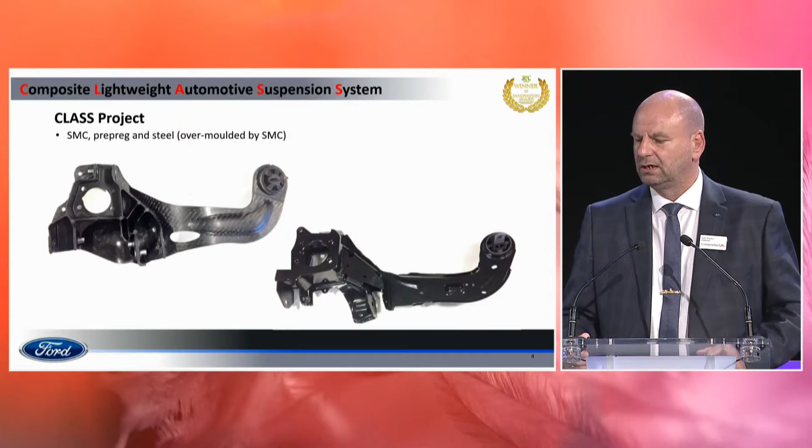So my role is to get as much weight out as possible to improve the payload efficiency of our commercial vehicle range. I'm going to take you through a couple of projects we've been doing at Ford in recent years. The first one was called Class.

People in the room are probably rolling their eyes now, thinking, he's not going to present that again, is he? I've presented this around the globe many times. This was a project that actually won the JEC Innovation Award in 2018, which we're very proud of.

This component was supposed to be a 100% carbon fiber rendition of the fabricated part you can see on the bottom right-hand side there, a rear suspension member for a Focus RS. So that's not my day job.

As I said, I'm a commercial vehicle guy, but this kind of landed on my desk, and we were very keen to work on it because I'd never worked in composite materials before, so I was really eager to learn. What we learned was we couldn't make it out of carbon fiber, not in its entirety.

After about 2 years of this project, we realized the goal we had just wasn't feasible. What we ended up with was a mix of carbon fiber material: we had UD prepreg from the front to the end, but SMC in the areas where we needed heavy geometry overmolding a steel insert. So we had 3 different materials and 2 different resins that we compressed and molded to make this part.

The reason for doing this is because we make the unsprung weight a little bit better, so we improve the suspension performance, but we also improve vehicle performance a little bit and reduce its CO2 output because the vehicle's lighter.

So we did a life cycle analysis on this - I'm not going to go over that project in detail, but I'll happily answer questions on it later. If you think of a Focus platform, that goes all the way from a basic Ford Focus we have in Europe, all the way to some of the really high-end Lincoln derivatives we sell in the US.

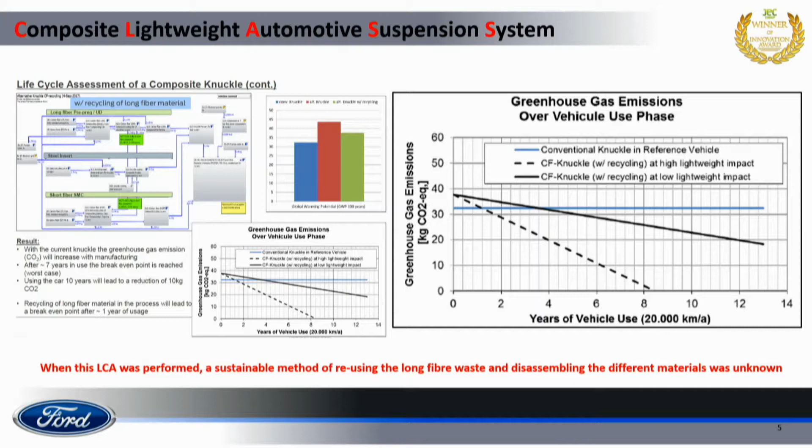So depending on the derivative you have will depend on how much CO2 you actually save on that vehicle. In the best case, we would get CO2 payback on a full LCA analysis using the Gabi software in just over 1 year. In the worst case, if it's a really heavy vehicle, we get CO2 payback in just over 3.75 years.

Now, that was dependent on us being able to find a method of recycling the waste carbon fiber from the prepreg. When we did that project - and it's written there in red at the bottom - we didn't really have that process; that was kind of a goal. Without that recycling of the waste material from the prepreg, those LCA numbers are quite a lot different.

So the reason I bring that slide up is because I'm going to test your memories later, because I'll come back to it.

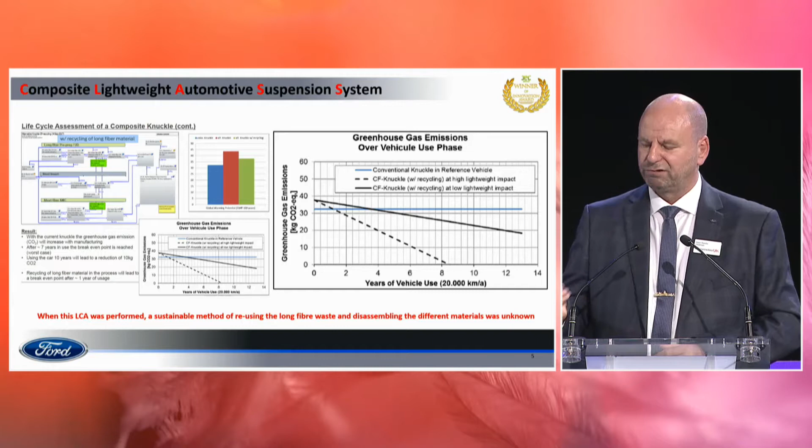The project I want to take you through today is called Chassis. This is actually my day job, so I'll take you through what we did for the weight-saving capabilities of a suspension system for a transit van. We've all seen transit vans, the fastest vehicle in the world - it doesn't matter what you're driving, there's always one in your rear view mirror trying to get past you. So you can see the scale of the project we had.

The steel part is on the left-hand side, weighing just over 21 kilos. The picture second from the left is the hybrid concept - the CAD concept that we had. The picture second from the right is the actual part that we made. That part weighed 12.5 kilos, which was just over 40% weight saving - which is just remarkable.

We're doing an investigation into whether, instead of carbon fiber for the top and bottom pressing, we could use flax. If we use flax, we can get another roughly half a kilo out of it, so that would be a 42% weight save. That's something we're going to use as a follow-up.

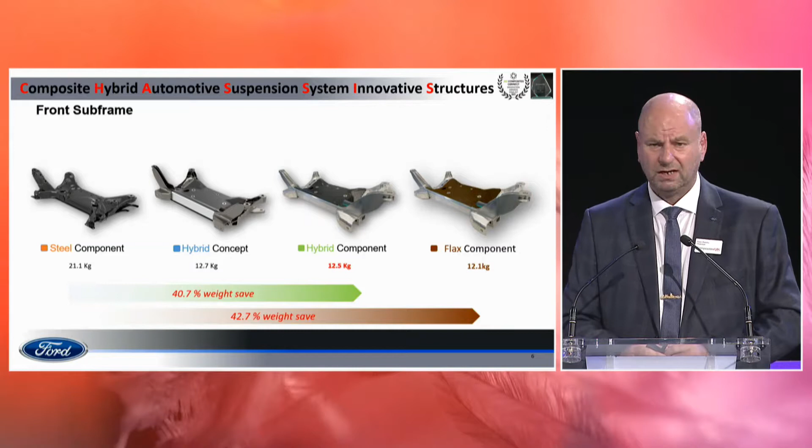That particular component - you can see the makeup there. We use high pressure die cast parts, what we call side rails, which are the parts the carbon fiber goes onto. Then we have a carbon fiber pre-preg upper and lower panel, 6 layers thick in various degrees. We have an SMC rear panel, as you can see there, with an aluminium front tube, as we call it. We could have used glass or carbon fiber for that aluminium part, but it didn't really add much to the design, while it did add quite a lot of cost. Hence we went with an aluminium extrusion there.

You can tell from all the processes there, we're not using anything that isn't mass producible. There's nothing within this design that we couldn't meet the volume requirements of a transit, which by the way is about 500,000 vehicles a year - that's a huge volume we have for transit.

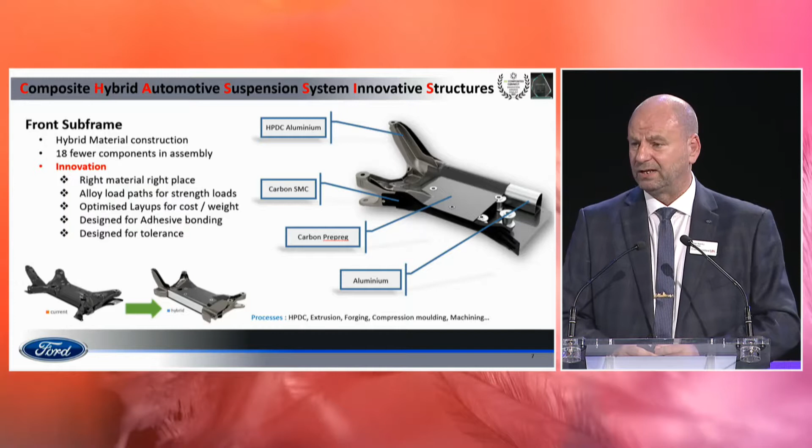We looked at the front lower control arm of that vehicle. The steel part again is on the left-hand side, weighing just over 4 kilos. The picture in the middle is the CAD rendition of what we thought it would look like, and the part on the right-hand side is what it actually looks like. That was just under 30% weight save - we were quite happy with that.

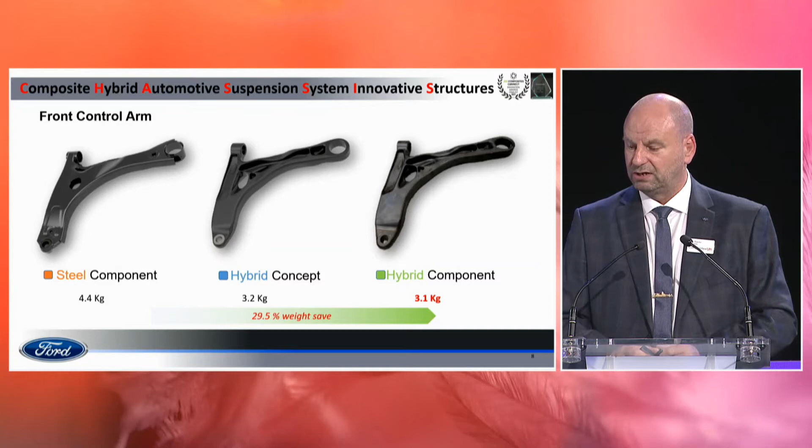Again, I'll go over the design makeup of that. This is actually 3 materials, and we learned our lessons from the class projects on the previous slide, because we use a mix of materials - steel and carbon fiber. This part uses a steel insert for what we call the puck, where the suspension ball joint fits into. It could have been carbon fiber, but the brakes are in very close proximity, so the easiest way to do that for package was to maintain the steel ball joint attachment. So we kept that steel part.

That's overmolded by nylon with a long glass fiber inner core, and then that whole thing is overmolded with a long carbon fiber outer core, again in nylon. We use forging for the steel, and injection molding for the composite materials. Again, absolutely no reason why you couldn't mass produce this part to satisfy the entire volume.

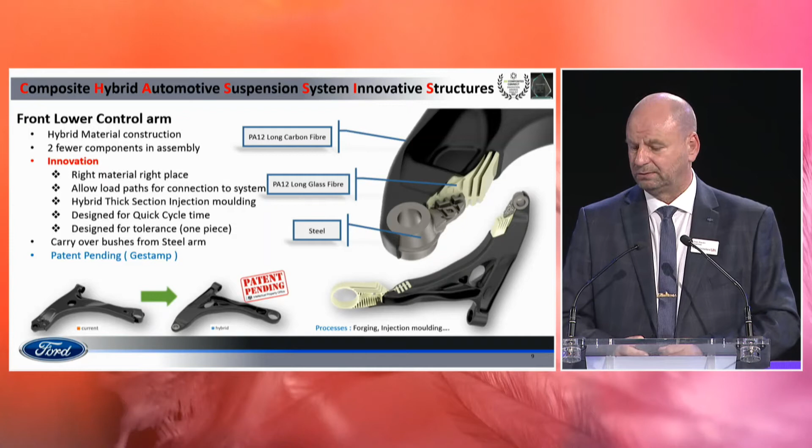Then we have the final component I'm going to take you through - our rear deadbeam axle. This is used on our front wheel drive vehicles, so unfortunately you don't get those in the US. These are available in Europe and the rest of the world.

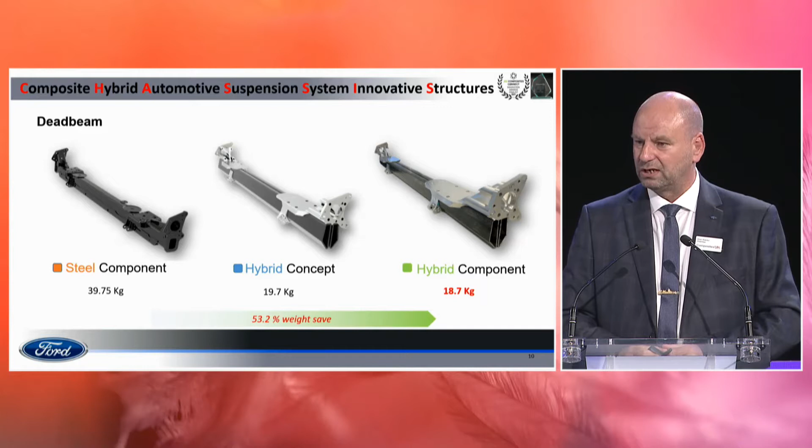The steel component we use for this weighs just under 40 kilos - a substantial amount of steel on those parts. The CAD rendition in the middle, we thought would weigh about 19.7 kilos, but it actually weighed 18.7 when we finished, so we're really pleased with the performance of this part. That's a 53.2% weight reduction, which is just staggering. Usually at Ford Motor Company, if we wanted to save 10 kilos, we'd sell a close family member for that kind of weight, so to get a 53% weight saving out of one component is just incredible.

Again, we use a process called pultrusion for the main beam, and if you've never seen pultrusion, I urge you to Google it - it's basically witchcraft. It involves quite a lot of glass, carbon, and different sections of carbon going through a resin bath, and then through a lot of dies before it comes out in that shape.

There's nothing within that design that we couldn't mass produce. Everything is entirely mass producible. You're probably wondering what the costs are for this. This was a research project more than anything else, but there's nothing really why we can't mass produce these, as long as there's a will to do it.

Because we use some relatively unknown processes for Ford, our cost target for this was $9 per kilo. So for every kilo that we save, we allowed the team to spend $9 to get that weight out. Honestly, we probably wouldn't spend that in production, but we do have a really good idea of where we would get that cost out. And all of these parts, by the way, have been on our test rig.

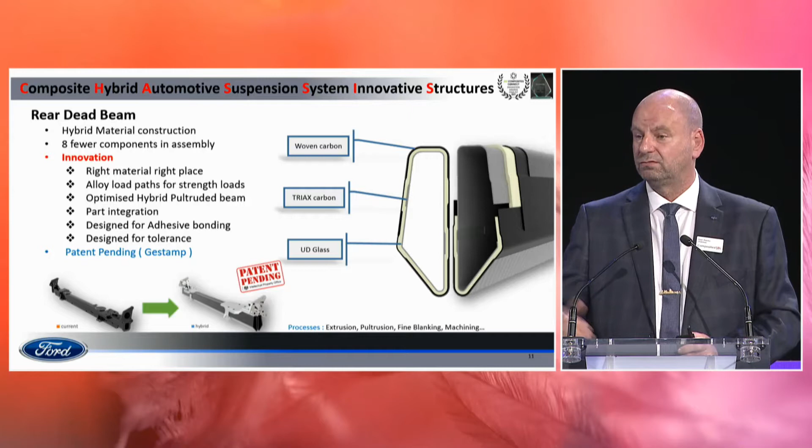In fact, the subframe and the dead beam outperformed their steel counterparts so much, they're clearly over-designed. So we have the opportunity to either change some of the materials for less expensive materials, or we can take even more weight out, because they massively outperform their steel counterparts.

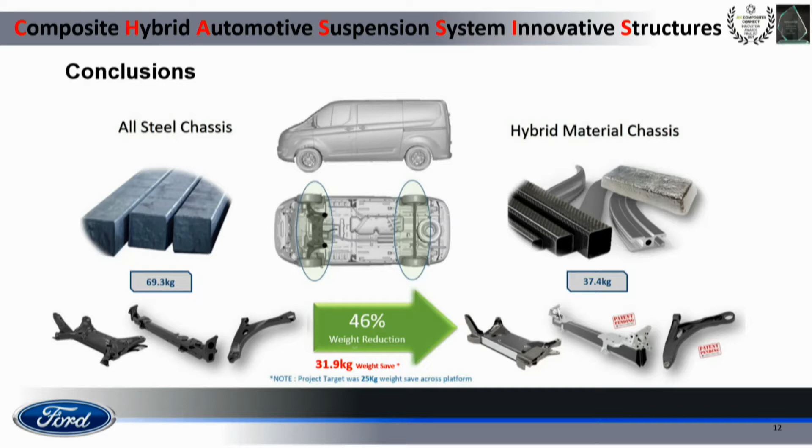So in summary of this, and there's only a few slides left, you'll be very pleased to know, we spend about 69.3 kilos for the steel parts. The aim of this project was to reduce the weight by 40%, which is very, very aggressive. But we actually achieved a 46% weight saving, and we're really pleased with the result. It's just under 32 kilos for the entire system.

Obviously, when we do this kind of thing, we want to increase the payload efficiency of the van, because that's our business model. But we are living in a world now, and there's no getting away from it, we are very focused on sustainability, and rightly so. We are entering a period of customer demographic who will not tolerate single-use plastic bags anymore. We can't do that. And this is the same demographic that is going to be buying our products in the future, and they will not tolerate unsustainable vehicles. They just won't. This is something we need to embrace.

So when we were designing these, obviously we're looking at the sustainability aspect. We did the life cycle analysis, as we did before. The front subframe, compared to its steel counterpart, would get CO2 payback in about 3.35 years, mainly because of the amount of pre-preg that we have in that. As you know, the energy embedment to make pre-preg is quite high.

The lower control arm would get payback in just over a year. Again, that's mainly glass, and that has a much lower embedded energy in its production. But the star of this particular show is the rear dead beam. We get payback in just over half a year on that part, mainly because there's a lot of glass in there, but the sheer amount of weight that we saved is just incredible. Now, that's a cradle to grave approach.

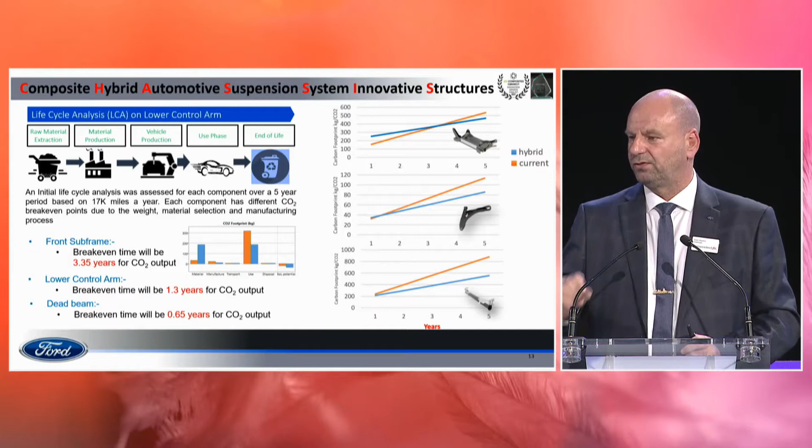I am desperately trying to convince our folks at Ford and our supplier base that we've got to stop thinking in terms of cradle to grave. We've got to start thinking about cradle to cradle. If we can't make these materials circular, frankly, we've all failed, and there's work to do there. So one of the things I want to take you through now is some of the work that we did with a company called B&M Longworth.

So I'm going to start with the middle pictures before anything else. This is the lower control arm. This process uses steam decompression to strip the resin from the fibers. Because it's only using steam, it just cleans the fibers, it doesn't damage them in any way, it leaves them absolutely pristine. So if they were pristine fiber when they went in, they're going to be pristine fiber when they come out.

The lower control arm is co-molded with glass and carbon, as you saw. I had always assumed that if we were going to put this into production and I needed to be responsible for the recycling of it, I'd have to redesign that part, because how do I separate glass and carbon if I want to reuse the material? I showed this to B&M Longworth and said, I'm going to have to design this. They said, well, we're not sure about that - send us the parts and we'll have a look for you.

So they put that through their DEECOM process, as you can see here, and the resin stripped straight off, and what we're left with is the glass and the carbon in its purest form, as you can see there. Now, they are sort of commingled because that's how we molded them. So we need to find a way of separating those materials so that we don't contaminate the carbon with the glass and the glass with the carbon. We don't think that's undoable. We just haven't had to look at it yet.

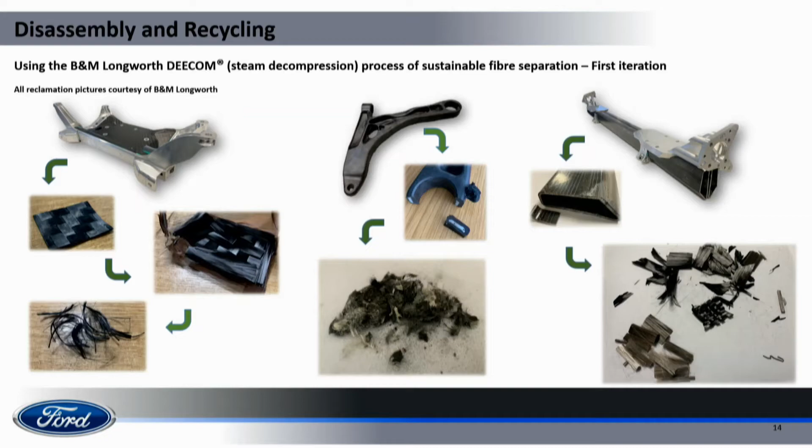And we get the material for free to use in the reclamation process. We're really keen that this process is going to work, and I really urge you to go and see the stand in Hall 5.

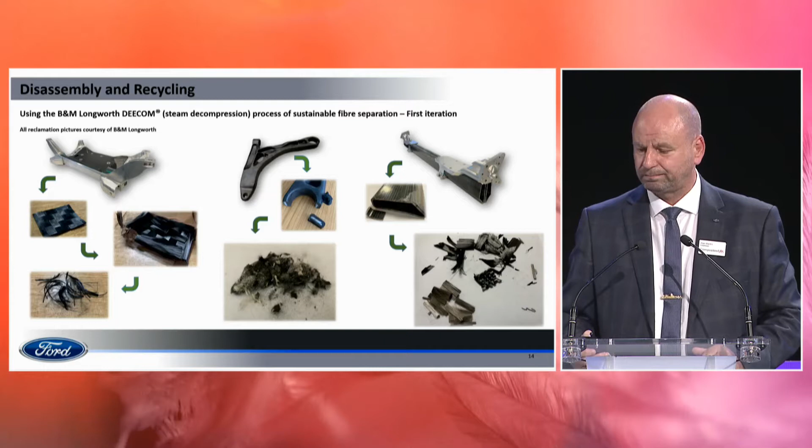I'm going to quickly wrap up. This is the project I've got going at the moment, called E-Shadow: Electrified Structural Hybrid Automotive Designs for Optimised Weight. Yes, we spend more time thinking of an acronym for the cool word than we do actually working on the project, as you might imagine. This is a project we're doing with a UK consortium to try and get 40% of the weight out of the ladder frame for a transit van conversion vehicle.

Those of you who have seen the amount of commercial vehicles on the road these days could be forgiven for thinking Ford invented COVID, because we've sold more transit vans than ever before. In fact, the best-selling vehicle in Britain last year was a Ford Transit—not the best-selling van, the best-selling vehicle—outselling the next best-selling car by 40,000 units. So it's really important that we maximise the weight efficiency for our converters.

So this vehicle will ultimately become, we're hoping, a supermarket delivery vehicle. If we can get another 100 kilos in the back of that, which is the weight target we're going for with this, we're going to be really happy about it.

This project is about halfway through. We're hoping to see some parts come off tool at the beginning of next year, maybe the end of this year if we're lucky. But it's going really, really well, and I'm hoping that next time I come back to JEC, I can give you some more details on this one.

So I'm going to be quiet—I've got 20 seconds left. That's me. I'll happily take questions at the end of this. If you've got anything you want more details on, you can find me on the UK pavilion, or come and find me afterwards. Thank you very much.

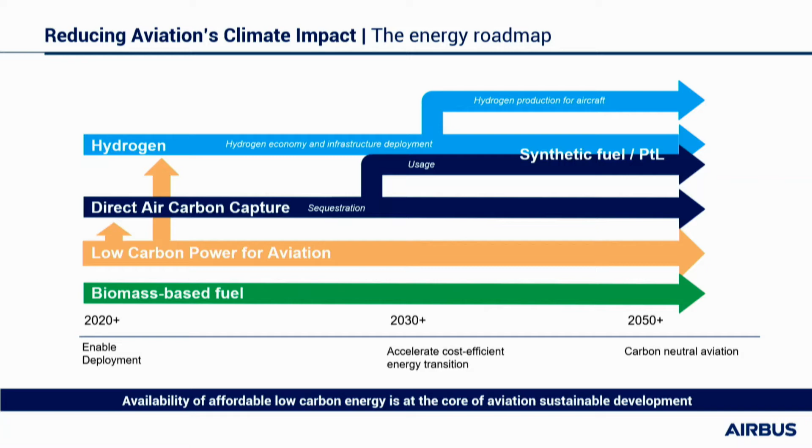If you're going to produce PTL, you're going to need to produce hydrogen. And we believe that as well as producing PTL and supplying that fleet which is existing today, you can take some of that hydrogen and put it directly onto aircraft and use it directly without producing PTL. And that's what the project that I'm working on and leading is all about.

Here's just, before we get onto that, a little chart which comes from the International Energy Agency of where we are today in terms of energy. You can see that over the next 30 years, they're predicting that we will more than double the world's requirement for electricity. And in that time, we need to make a conversion from coal, from oil, from gas, towards sustainable sources of electricity.

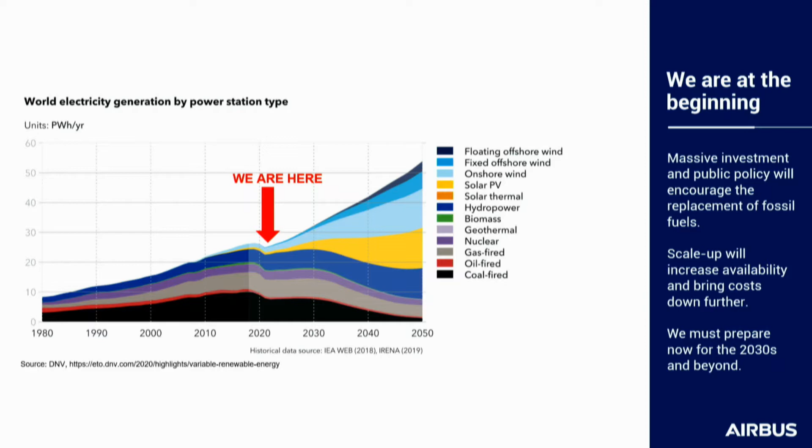That is an enormous challenge for governments and agencies around the earth to make that transition. It will require a huge investment, but it's a huge opportunity. If you happen to have a few spare billions to invest in the land and infrastructure to do that, I believe there's an enormous amount of money to be made. Some of the people producing petroleum today are in the perfect parts of the world to be harvesting sunlight and producing green electricity, and I believe they have the vision to do it.

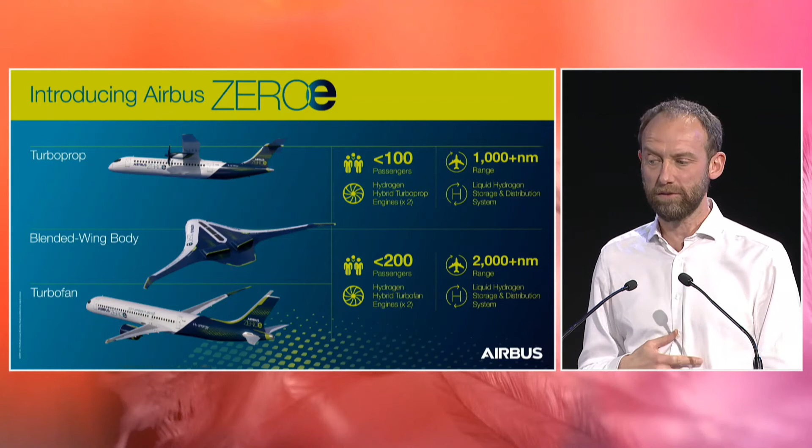These are the aircraft that we have proposed and that we're working on very actively. I can tell you the investments that Airbus are making directly in this are absolutely eye-watering for the state of where we are, if I'm saying these things are going into service in the middle of the next decade. We're at very early levels of development today, but we are investing hundreds of millions of euros into these aircraft on an annual basis.

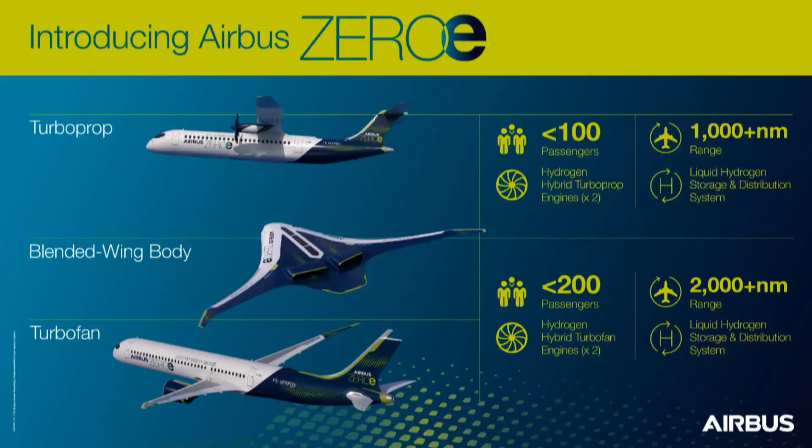You've got three different aircraft there. You've got the turboprop at the top, which is probably the one you'll expect to see earliest, maybe heading up towards 100 people and about 1,000 nautical miles. The biggest aircraft today, A350s, 787s, can fly 7, 8, 9,000 nautical miles. But the vast majority of journeys made by aviation are less than 1,000 nautical miles. Almost the whole aviation industry around Europe, EasyJet and Air France flying around Europe, around Asia, a lot of the stuff in the States, you're in the 1,000 nautical mile range. There's a huge market addressable by that product.

We've got something else we're working on which is very attractive from an aerodynamic perspective, the blended wing body. Very innovative and very challenging, something many people will have seen in various forums over the years, but it brings a lot of opportunity in terms of storing hydrogen and gives us interesting ways of looking at the architecture of the plane and finding places to put the tanks, which is the main challenge. Then at the bottom, something that looks a lot more like an aircraft we're used to seeing and getting on board. That aircraft has the capability to go further, heading up towards 200 people maybe, and up towards 2,000 nautical miles. That one would have large tanks at the rear of the fuselage, and links to turbofans rather than props, so something that looks a lot more similar.

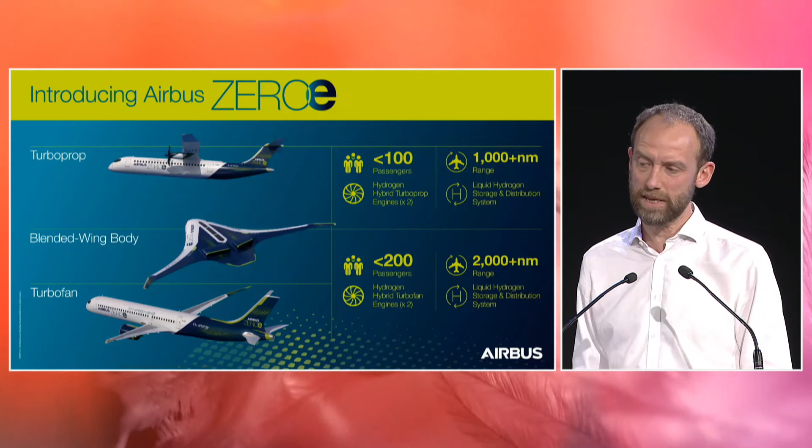But we're working on all of those things together, and really my job at the moment is to lead all of the technology work to make sure that we're ready and have the ability to refuel the aircraft in roughly the same amount of time it takes to refuel an aircraft today, store that fuel for hours at a time so you can refuel the aircraft and come back to it the next morning and just go and fly, store it safely, be able to maintain the aircraft, distribute the fuel, and then burn it.

Today, I must admit, standing in front of a room full of composite enthusiasts, that tank on the first aircraft is almost certainly going to be an aluminium tank, but double-walled with a vacuum in between the two walls, a very high degree of vacuum with MLI, the same technology you'd see on rockets going into space for liquid helium tanks and things like that. So 2 of them for redundancy and in terms of the safety case, to make sure we're able to continue flight if there's any failures.

And then a liquid distribution system, actually distributing liquid hydrogen throughout the aircraft with, again, double-walled pipes, insulated in between the 2 walls with vacuum, with the vibration, with the challenge of all the different flexibility you see, landing, taking off, all those shock loads, having to deal with that, maintain the temperatures, maintain the vacuum. It's a bit of a challenge, I can tell you. And then on this particular aircraft, we would have a fuel cell supplementing potentially a turboprop.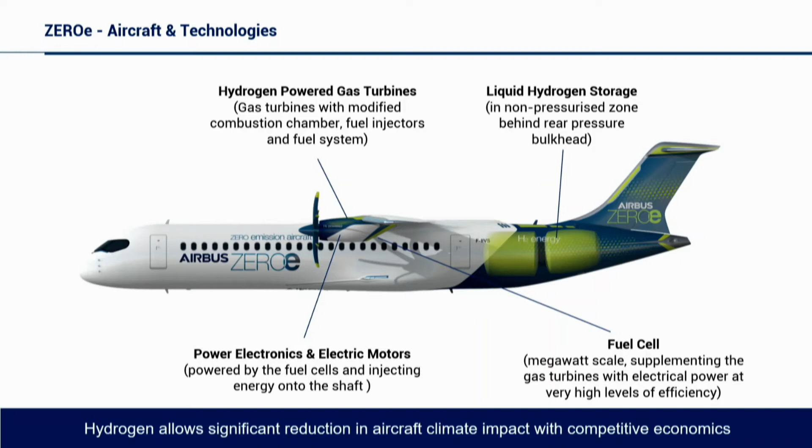We're doing a huge amount of research to try and be ready for something with a fuel cell, but also looking at a direct burn, with a motor on the front and a fan on the top. With that arrangement, you have a huge amount of heat being generated.

The fuel cells are pretty efficient, the motors are very efficient, but you don't have to be very inefficient to generate a lot of heat. So one of the big challenges with that engine arrangement is to deal with the heat. When you have a turbojet, the heat goes out the back, and that's part of the joy of flying. But we would have to deal with that heat. So there's a lot of challenges in there, but it's a very, very exciting opportunity.

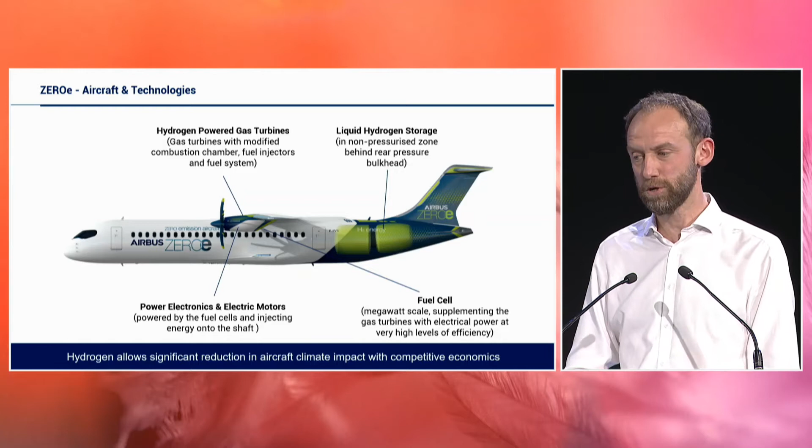We don't have very much carbon inside the hydrogen system today. I would very much like to move away from an aluminium tank and get towards a composite tank, but the technology isn't quite there yet today, even in the timeframes that we're looking at for cryogenic hydrogen with the dormancy time that we want. But we saw that energy demand.

We know that even with the reductions in clean energy prices, which are happening today, really severe reductions in the price of clean energy, it will still be very expensive to make green hydrogen. And our airline customers are already very, very interested in fuel burn reduction. That's the main reason that we put carbon on board the aircraft today, is to reduce the weight and reduce the fuel burn. That will be even more important in the future.

So there will be an even stronger drive to make the aircraft lighter, more aerodynamically efficient, with cleverer systems able to respond more quickly, more flexibility in the wings, everything that we can throw at it to try and reduce the amount of fuel that is burnt.

Even if the fuel is not directly impacting the climate, we still don't want to have to pay for it, and neither do our airline customers. So we will need composites on board that aircraft to deliver the best aircraft that we possibly can, because the hydrogen system is so difficult.

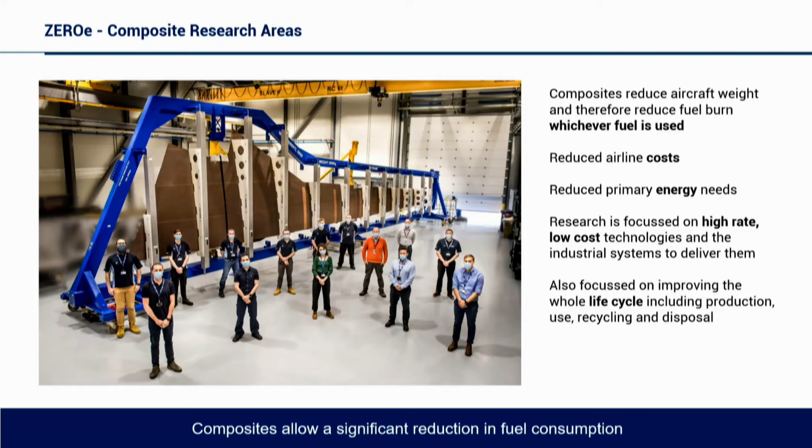We have a lot of research going on. This is a panel, a cover that's been developed in the UK with the National Composites Centre, with ourselves and a number of other people. We've got a whole wing box demonstrated there, which this is contributing to.

But we have composite research going on throughout the aircraft, in the fuselage, in the empennage, focused on that ability to take weight out of the aircraft, but also by reducing the cost of manufacturing, reducing the energy needs to do that, and making sure that we can do it at rate.

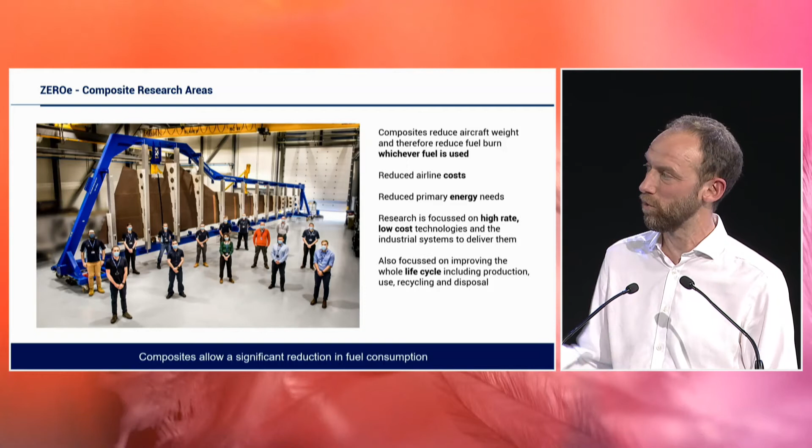So we want to be able to produce these aircraft at high rate. This isn't an A350 where we do 10 a month. This is supposed to be getting towards the A320 where we produce 70 a month — 2 or 3 A320s are produced every day. That's the scale of things that we do, and we need to be able to replicate that with this composite.

We also need to be dealing with the life cycle. It's a different challenge with aerospace. The amount of CO2 that's pumped into the atmosphere during the lifetime of an aircraft is about 1,000 times more than the amount of CO2 pumped into the atmosphere during the manufacturing of today's planes. We put that into our financial declarations in the last couple of years.

So for us, the focus is on reducing the fuel burn, because that's where the majority of the climate impact is. Nonetheless, we need those processes to be as green as possible, and you're absolutely right. Today, we waste a horrible amount of carbon, and the carbon that we put on the aircraft is completely unrecyclable today, and we must work at that.

So that's for the primary structure, and also for all of the structure within the cabin, where it's probably a little bit easier, but still challenging.

So the primary focus is on weight and aerodynamics and getting the fuel burn down, but we also have a very strong drive on life cycle, on recyclability, on reuse, and on green fibers and resins up front, because today the stuff isn't very nice. We'd like to escape that.

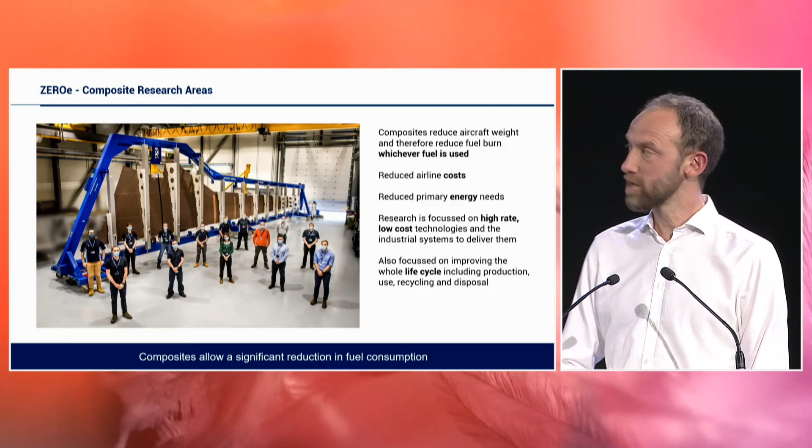And that is, ladies and gentlemen, all I was going to say. Thank you very much.